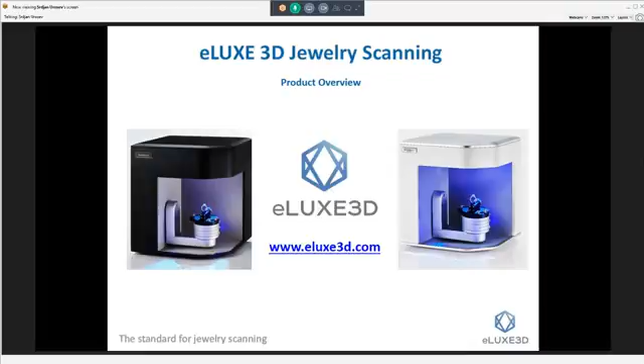For those not familiar with three-dimensional scanning, the two primary forms are laser scanning or structured light scanning. Laser scanners tend to have a sweeping red, blue, or even green line that's automated or sometimes manually operated with an external coordinate measuring machine, usually a fixed line that sweeps along the part and acquires point cloud data, which is ultimately turned into an STL or polygonal model.

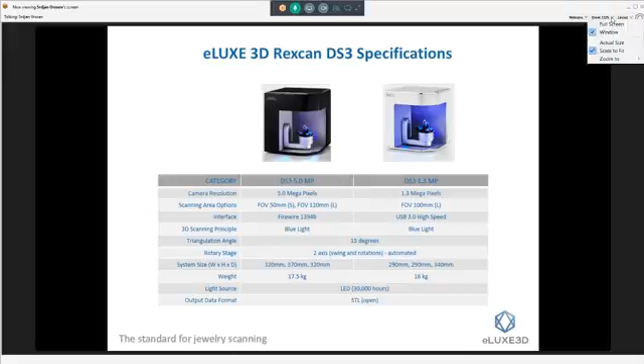Our technology works differently, in a structured light fashion - it's a megapixel-based system that works just like a digital camera. Your iPhone or traditional digital camera is a 5, 10, or maybe 40 megapixel system that acquires images in 2D. Our technology has the same principle, but it collects images in 3D. We project a fringe pattern onto the object, and the two cameras collecting and looking at the fringe pattern define the resolution and gather the data three-dimensionally. We don't have a lot of moving parts - the only moving part you'll see in the scanner is the platform swing that rotates and is fully automated. You'll see this live in just a minute.

The two systems we currently carry commercially are the Rexcan DS3 Silver and the Rexcan DS3 Gold. The primary difference between the two is resolution. The Silver system is a 1.3 megapixel, USB-based system that collects 1.3 million points per shot. The DS3 Gold is a 5 megapixel system with very high resolution, collecting 5 million points per shot. You can see some of the technical specifications here.

On the DS3 5-megapixel system, we've developed two versions: a 50 millimeter field of view and a 120 millimeter field of view. We initially had just the 120 millimeter field of view - that means how large of an object the system can see within a single scan, with 120mm being the maximum on the large field of view. We then developed the 50 millimeter field of view, a very high resolution system primarily targeted around detail-rich objects like engagement rings and high-resolution stones with lots of features. It's specifically designed for rings and very small objects within that 50 millimeter field of view.

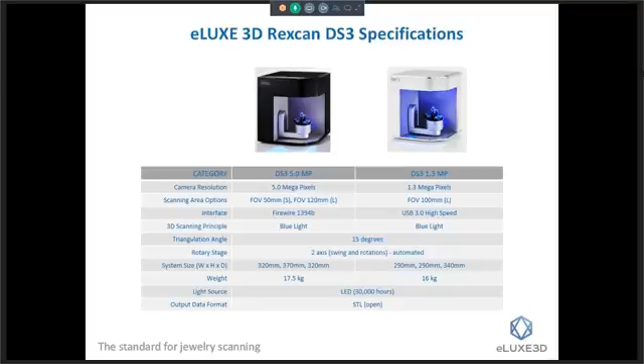One of the advantages that our systems carry is that we have an open STL platform, so we don't lock you into specific software that doesn't necessarily have any digital models. This gives us the opportunity to provide you with a digital model of some of the precious stones or precious pieces that have a lot of history behind them.

Custom fit wedding bands is a very popular use case. This process has taken a 3, 4, 5 day process down to less than a day. In 3 to 5 minutes, we're able to capture a perfect 3D model of that engagement ring, which gives you the opportunity to build that wedding band with a perfect fit. It really saves on the iterations of 3D printing and design iterations, so it's become very popular.

3D heirlooming, or digital heirlooming, is another format of use for our technology. Old existing pieces that may have been passed down to family members within generations can now be replicated or actually stored in a digital format, since they have family history behind them. So it's something a lot of our customers are doing.

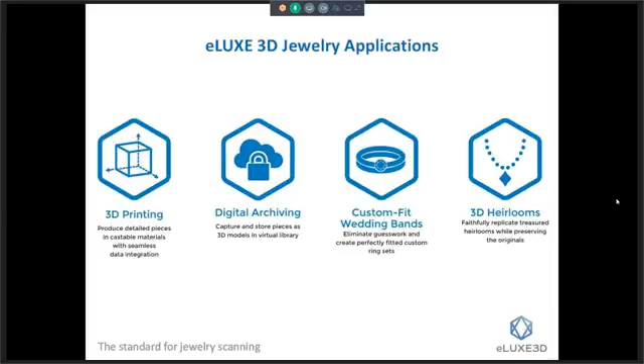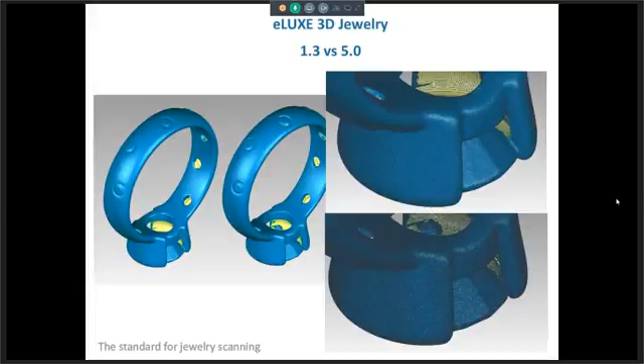To us, having been around the scanning industry for a very long time, this difference is something we can clearly see. But to somebody that's just looking to acquire data quickly for template or design purposes, the 1.3 megapixel system is a great system. You can kind of see the correlation between the two data sets.

Just a few samples for you of STL models — we're seeing on screen our STL models that are created from our scanner. Everything you're seeing are basically triangulated and fully watertight models.

Here's a ring that was scanned with a 5 megapixel system. You can see the detail and resolution — it's able to pick up on those prongs and how sharp and crisp they come out.

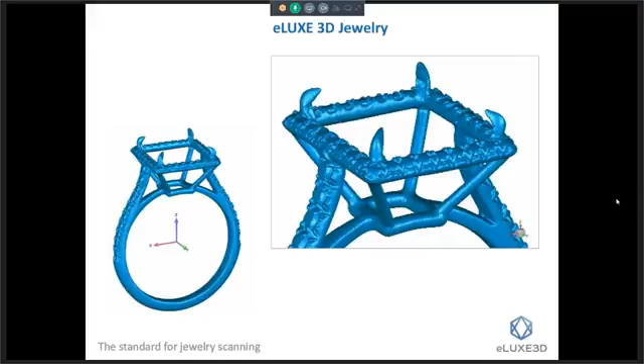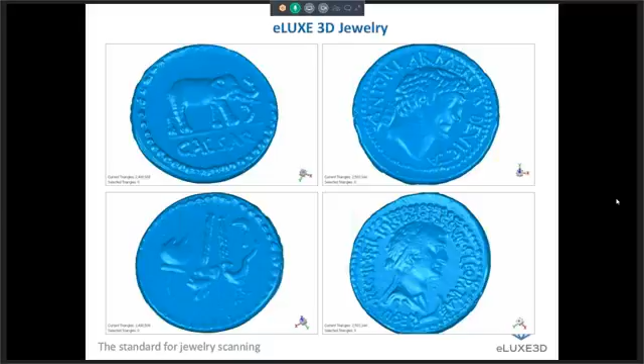Some old coins that were scanned in. Again, the detail is really something to pay attention to, because it's preserved very, very nicely in a polygonal format.

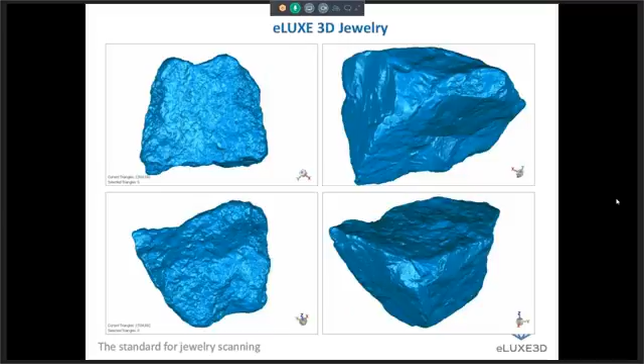These are just basic stones, but we wanted to show the actual capability and how much detail we're picking up. If you had some sort of an irregular stone that you needed to design around, we understand it's a very difficult process with traditional calipers and tracing methodologies, but we have the ability to provide a very detail-rich model for you to work with in your CAD packages.

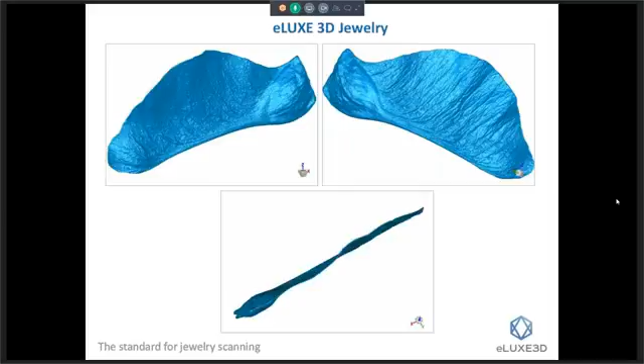This was a cool project we did for a local university. They just wanted to see if we could scan this — it was actually one of those helicopter leaves from a maple tree — just to see what kind of detail we're able to get. That's showing both sides of the actual leaf; you can see all the veins very crisply. This was done with a 5 megapixel small field of view, 50 millimeter field of view, so it gives you a real world scenario of what the capabilities are.

And of course, adding any sort of accessories to existing commercial products is a big market for some of you out there — the ability to take an existing product that's been launched and design accessories around it. This is just a Samsung watch, I believe, that was scanned with our 1.3 megapixel system scanner.

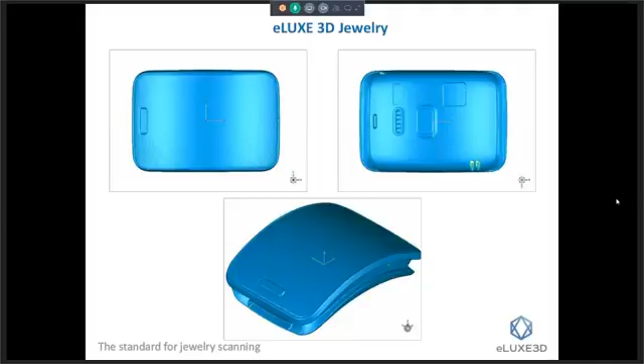So a lot of what we're talking about here is STL format-based. For our purposes at eLUXE3D, we are heavy users of Geomagic simply because we've been around it for a very long time. Geomagic Wrap in particular is a platform we utilize for cleaning up STLs, filling in holes, extracting features, and actually creating NURB surfaces. It's a product that's been around for a very long time and has developed a lot of great tools for being able to work with high-resolution STL models.

A lot of our customers use a combination of ZBrush, Rhino, Gemvision Matrix, 3Design, a few others that are out there. But we want to put enough tools in front of you to understand what you can and can't do with the technology and what the limitations are, because if you think about how much data we're collecting - millions and millions of polygons - there are certain CAD packages that are not designed to handle this type of geometry.

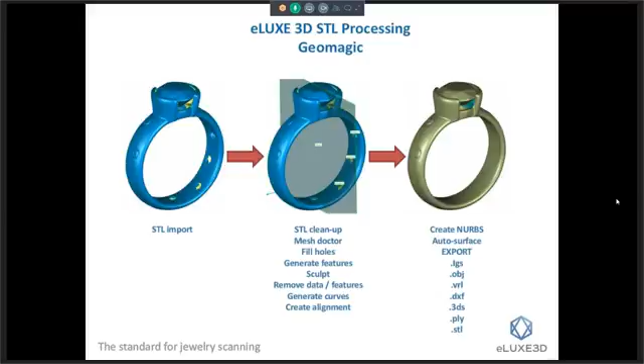So we're always working with our CAD suppliers and vendors to improve on their processing side. But for our immediate need, our go-to product is Geomagic on the reverse engineering side and on the inspection side. As I mentioned, it has a lot of polygon sculpting and cleanup capabilities to get you that watertight model.

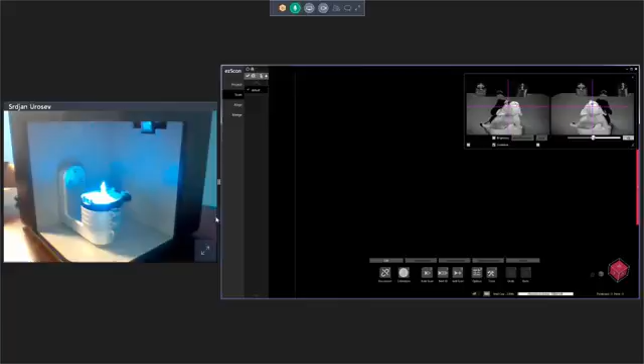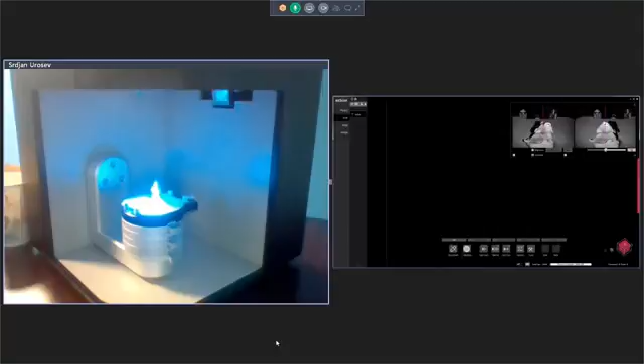Okay, we're back. Successfully transitioned from one piece of software to another, so that's always a good start to the day. You should be able to see a webcam showing the actual platform of the scanner itself, and in the background, depending on your layout, you can see our software product that we're going to be using to collect the data. Over the past couple of years we've really focused on developing a software and hardware product that's very easy to use, very automated, and doesn't require a lot of technical expertise.

eZScan 8 is a software platform that was recently launched in conjunction with the DS3 and the Silver and Gold systems, and we really were able to create a product that follows a process. So just to show you a little bit of the layout and how this software is actually developed...

On our left-hand side, we have our project tab, which is our starting tab for starting a new project or opening an existing one. Then we follow a process: we have our scan tab, align tab, and merge tab. We really want to create a process flow that your technical people use as they walk through the scanning process, so anything within your scanning capabilities that allows you to acquire data would be under your scan tab.

You can see this is a live feed - the left and right cameras are actually live right now. So if I put my hand in there, you can see it's actually picking up the data live. This little pendant we're scanning is a little puppy, about an inch in height, so it's relatively small. It has some detail on it, and this is what we'll be working with today.

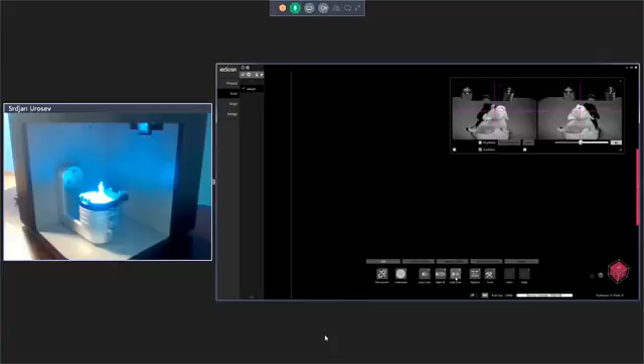We have what's called auto scan, which we're going to be running - it's just a string of macros. We have a next 10 button, which is unique to our technology, where the software automatically calculates the missing areas in the scan and generates the next 10 paths. Or we have what's called add scan, just an individual scan. If I click on add scan here, the system is going to move to a position we're looking at currently, and it's going to take a single shot.

And there's what we're kind of seeing on the screen from one orientation. Now you can tell that we've scanned some of the platform, the fixturing system that we currently use is just some putty.

The system does come with a ring jig. It comes with a full fixturing setup. But anything that'll just kind of fixture your object in a permanent orientation can be utilized to hold it in place. Your object cannot be moving independently from the swing or the turntable.

So what happens during the calibration process, we actually create an internal coordinate system that's saved within the calibration file. So every time we move this swing, it knows its previous position and registers the data together.

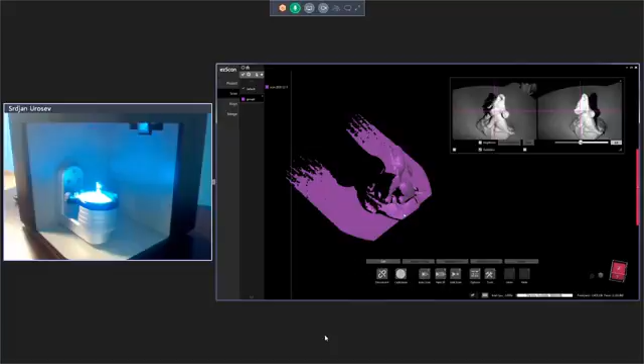So one nice tool I like to use here to kind of avoid scanning some of the turntable or the platform, what we're going to do is turn on what's called a clipping plane. I may be getting into some of the technical aspects of the software, but it's kind of nice to show.

So what I'll do is turn on our virtual clipping plane. I'm going to drop that clipping plane to right about there, and then we're just going to go ahead and hide that. Now as I run our macro, we're going to go through and delete anything that's below that plane. It really saves a little bit of time and cleanup and processing. So I'll go ahead and delete this group.

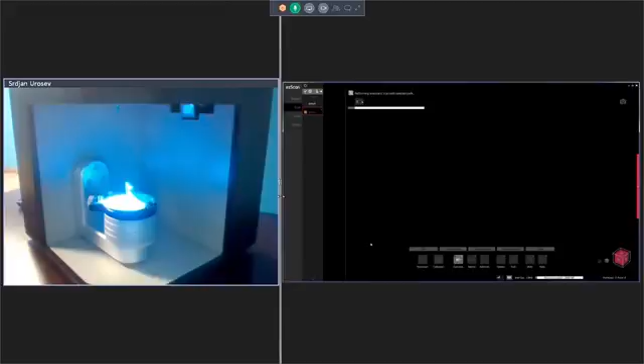And instead of doing an individual scan, I'm going to run through what's called an auto scan. This is basically a macro of, I think, 12 to 14 positions that we have for demonstration purposes. So it's really hands-off. You set the part down, you fixture it, hit the play button, and let the software do its thing.

There's no registration that has to be done on the fly. Everything is done automatically as far as scanning is concerned.

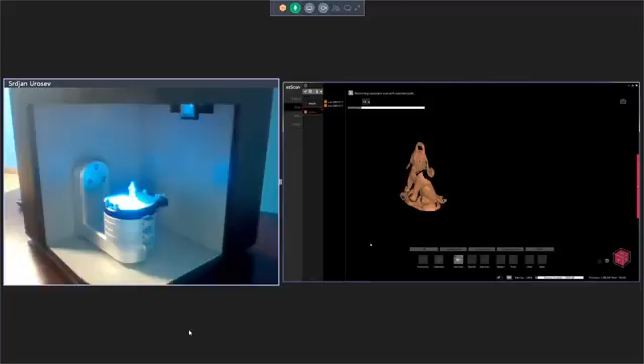Looking back on the left-hand side, we have a group 1 being created. So as we're running this macro, the software automatically creates a group, and within that group you can see scans being populated. So we have scan 1, scan 2, scan 3. It basically follows with a date and timestamp, but those names could obviously be changed if needed.

So we're scanning live right now, as you should see on the screen. This puppy is being populated very, very quickly.

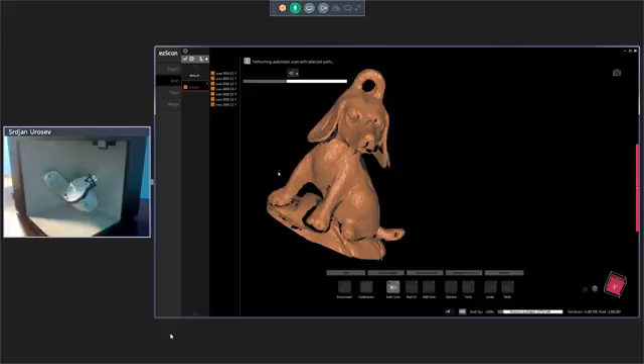I'm going to zoom in a little bit for you guys so you can see some of the detail. There are some waves in the actual design of this piece. The eyeballs are some sort of tiny little stones, but this orange peel detail that you're seeing on the puppy is actually on the object. This is not scan noise or something like that. This is actually detail that was designed into our piece here.

So we'll let this finalize, and what I'd like to do today is walk you through the full process and what limitations we have with the system, and what we need to do in order to have a full 3D scan that might be watertight, if you will.

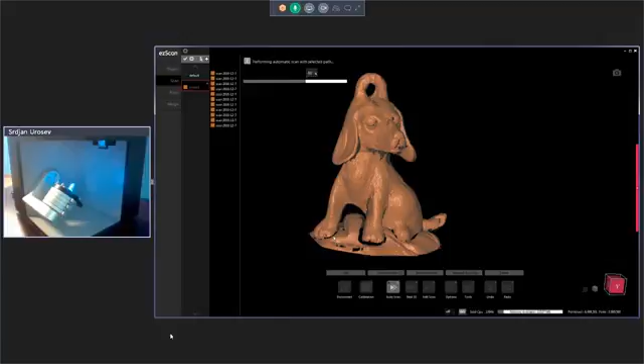Because as you may know, with non-contact scanning, it is line of sight based. What line of sight means is that what it sees, it will scan. So if I gently rotate this guy kind of upside down, you can see we're going to have some missing data simply because the scanner can't quite see that location underneath.

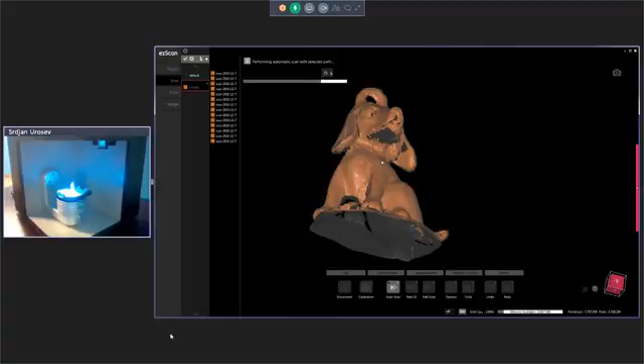So some objects, some very high detailed rings that have pockets or holes that are not visible to the naked eye in certain orientations, the scanner might have a hard time seeing those. But with multiple orientations, we typically are able to gather most, if not all, of the data.

But that's just something for you guys to understand, that we're not seeing through objects. We're not seeing through the actual physical object. We don't see through stones. It is line of sight. So once...

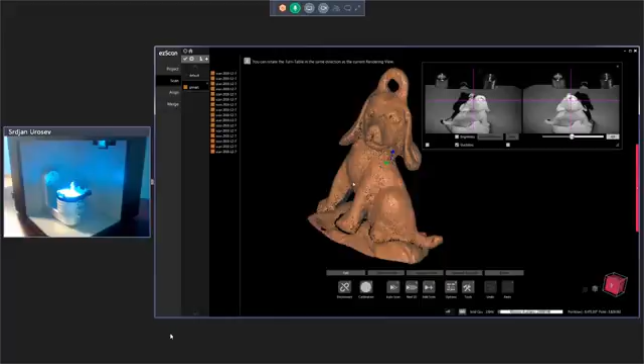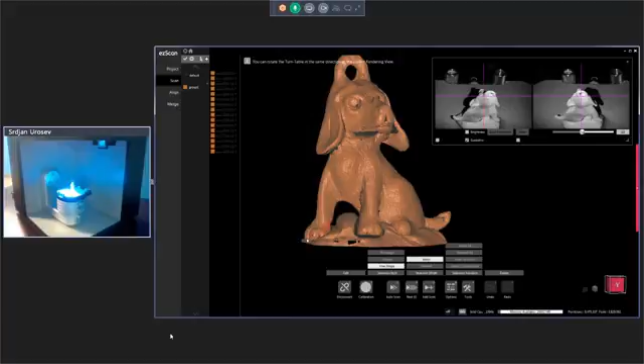So quickly, at this point, what I'm going to do is delete some of this putty, or the fixturing, if you will. I'm going to turn on my edit command. I'm going to use a free shape and a select. So what I'll do is just kind of select the areas that I don't need and delete them out.

And if I touch on a little bit of our actual part, our puppy here, it's okay, because what we're going to do next is flip this puppy upside down and gather up the rest of the missing data, and then walk through an alignment process.

So again, we're doing this live. There are no tricks here behind what we're doing. We just want to get you guys to understand the full capability of the product.

Very easy workflow. If you put down the product for a couple weeks and turn it back on, it's not something you have to reach for the manual for. It's something you'll pick up automatically, which was kind of our key in trying to develop and streamline this process.

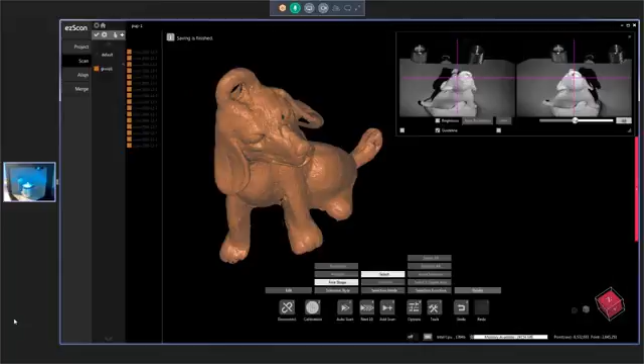I'm going to do a quick save as here, and we'll just call this Pup 1. I get in the habit of saving quite often, as you don't like to lose work, and in case there's some sort of a crash, you always have your file saved.

Okay, so here's what we're going to do now. We have our group 1, which has probably 85% of our scan, but we're missing a little bit of this guy on the bottom. So I'm actually going to remove this platform from our scanner, from our jig, and take this puppy off. I'm really doing this live, so please be patient with me.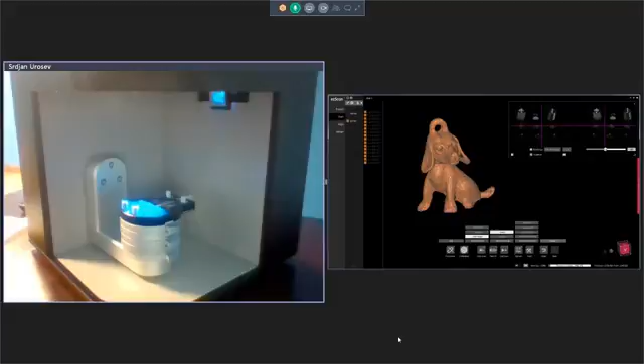We're going to just flip it upside down and fixture it back in. One thing I should have mentioned, which I didn't, is that we do add a little bit of spray on the object.

With scanning technology, if it's very shiny, reflective, transparent, or translucent, you have to spray the object down a little bit to take that shine and reflectivity off. It's very common with most scanning technologies out there. We have several different forms of spraying down the object, whether it's a 3D scan spray or a mixture of washable paint and an airbrush kit, and that's something we will definitely walk you guys through as needed.

So right now I'm going to flip this puppy upside down and add just a little bit of spray to it. Obviously you won't be seeing that portion, but trust me, that's what I'm doing. Make sure I've got him fixtured in so he doesn't move.

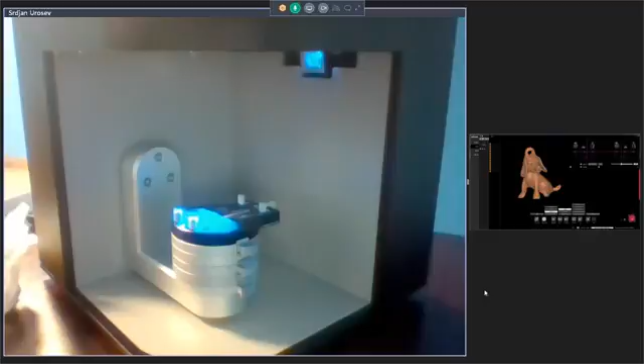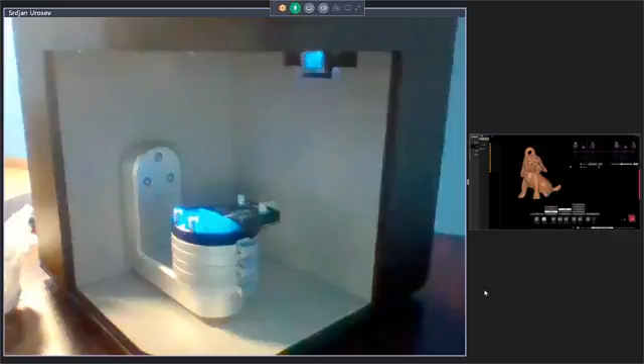You might be able to hear the spray in the background a little bit. This spray I'm using is actually a 3D scan spray developed by a company out of Germany called Helling. It adds about 3 to 5 microns of spray depending on how much texture you put on it, but it's a very, very fine spray that does not take away from the detail of your object.

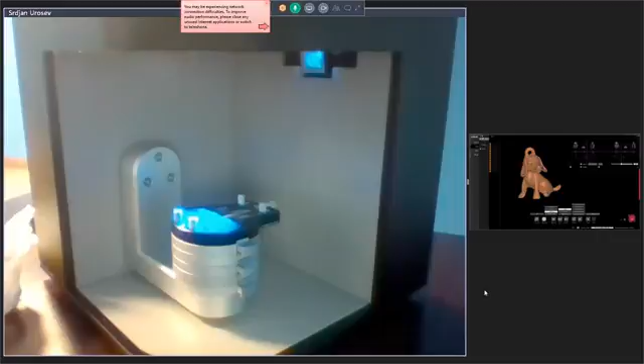Okay, I'll go ahead and drop this guy back into position and tighten up our fixture. And now you can see our camera is seeing a different view, a different orientation.

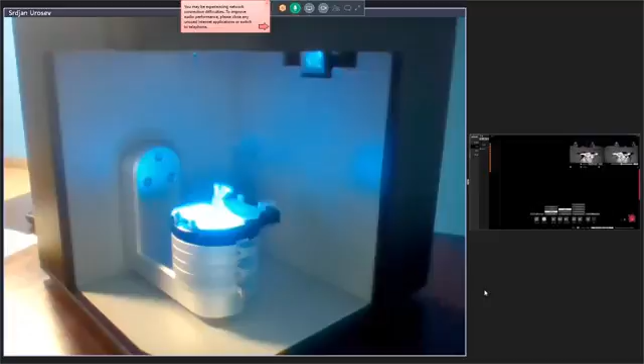At this point I'm just going to click on the auto scan button. Actually, what I'm going to do is take one scan because I'd like to predefine my clipping plane again. In order to predefine that clipping plane, you want to have one scan on the screen so you can see where you're trimming with the virtual clipping plane. Otherwise, you might be taken away from your object.

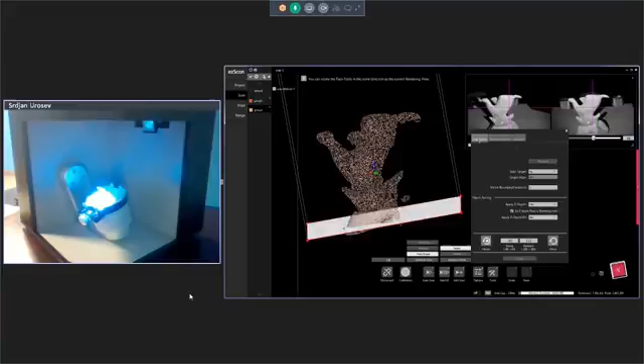So I'm going to go back into my options, turn on my clipping plane, and you can see that I can definitely bring this up a little bit. We're good there. I can delete group 2, and then I'm going to run auto scan with the same macro.

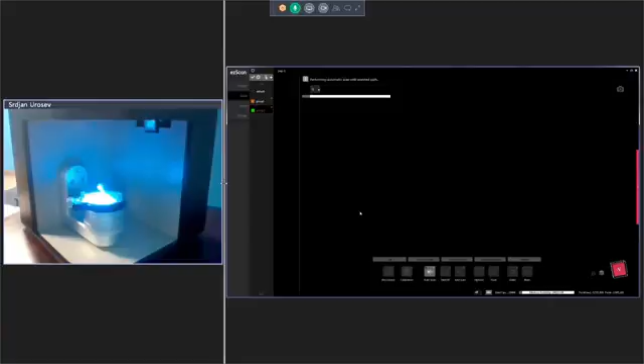The macros are basically kind of embedded in the product. You can create your own macro, and all a macro is, is a string of positions, a rotation and a swing. It's an XML file that could be edited, generated within the tools and options that we provide, or edited in just a notepad or some sort of comma separated value format. But all it is, is multiple orientations and a swing in position.

Once the actual swing moves, the scanner takes over and takes a picture. And now you can see we're kind of filling in the blanks. I'm running the same exact macro as we ran for group 1.

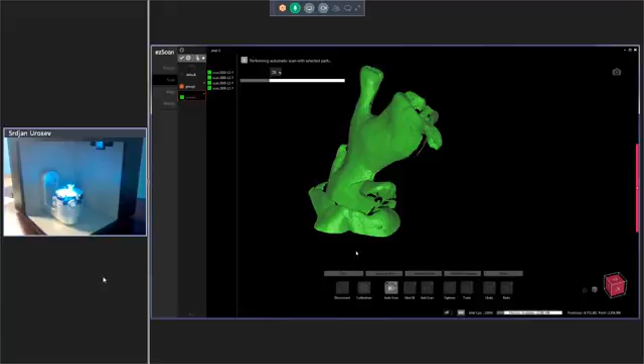As you can see on the left-hand side here, we have group 2 that was created, and all the individual scans that fall within group 2. Our next step is going to be to take group 1 and group 2 and align them together, which is something we're going to do in this product as well. So as soon as this is finished, we'll clean up some of the areas that we don't need and align them together.

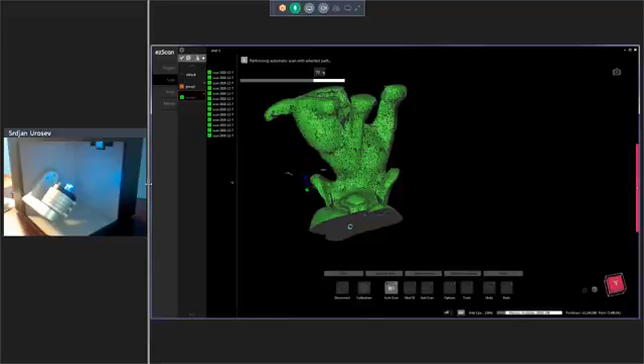All right, looks like we just finished the last scan. We're going through a quick global align. And there is our group 2 scan.

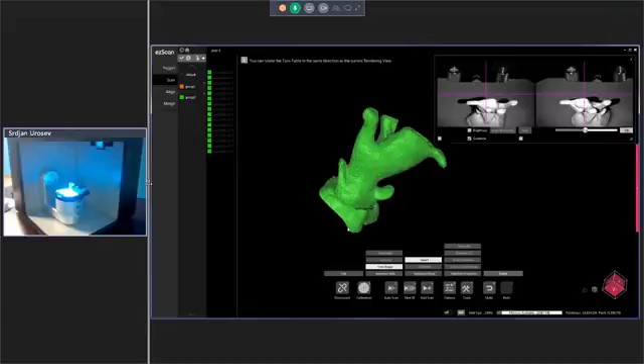Again, I'm going to go into our editing and just delete some of this noise that was picked up during the scanning, whether it's the platform or some background noise. I am going to zoom in and nicely trim around this putty.

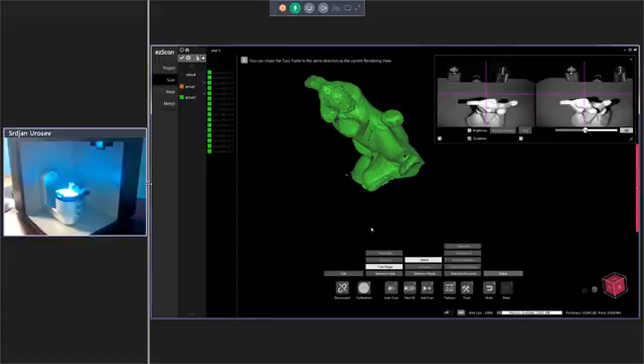This putty is just one of multiple forms of being able to fixture the object down. Hot glue is used quite often. Our customers have developed some of their own fixturing systems. The system, as I mentioned, does come with a very nice ring jig. It's basically a mini vise with some rubber padding on the inside, so it doesn't really deform your object. Again, the goal is just to fixture the object in an orientation that will prevent it from moving during scanning.

Okay, so now we have the bottom portion of our puppy scanned. To play it safe, I'm going to do a save as and overwrite the previous file. So we have that saved. Yes, we'll overwrite it. Now that our scanning is complete, we're going to go to the next phase, which is our align phase.

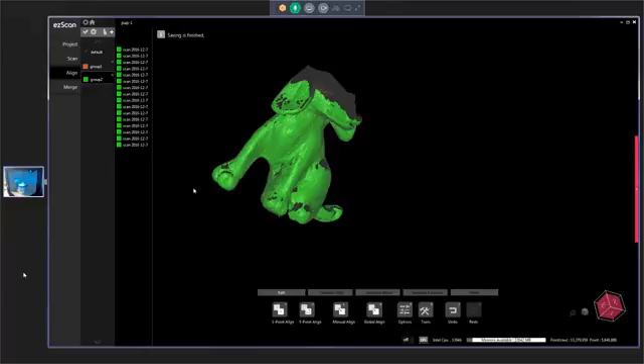As I click on the align phase, our cameras disappear. Now our icons down here at the bottom also change, and now we have a couple forms of alignment that we're going to be able to work with. I'll go ahead and turn on group 1, so you can see that we have 2 groups of scans that are in different orientations. And then we have a couple different alignment options here.

We have a 1-point alignment, a 3-point alignment, a manual alignment, and then a global alignment. These are very standard alignments that you guys may have seen in other CAD packages. 1 point is most common that we use. It's a very nice form of alignment. You just click on one common point and the software will take over. 3 points will allow you to pick 3 common points. Manual alignment will allow you to just rotate one of the objects on the screen manually. And then global alignment is basically a curvature-based global registration that we'll do as a final step to ensure all the individual scans are globally registered.

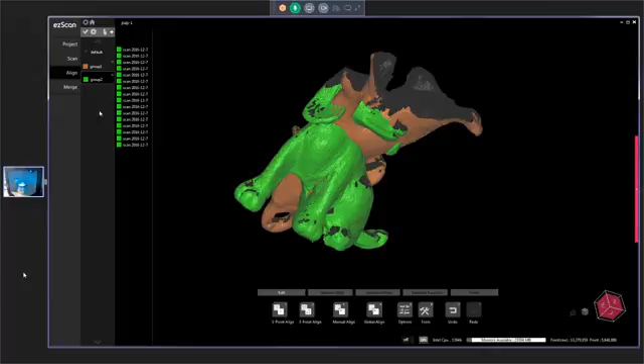So what we do here is we click on the group that we want to move. I'll make group 2 as my movable object. I'm going to click on that, and I'll click on 1-point align. This breaks up our screen into 3 orientations. We have our blue, which is our movable, in the upper right-hand side. We have our white model, which is our fixed model, in the lower right-hand side. And then on the left side, we have our blue and white showing us what the actual alignment is going to look like when done.

So with the 1-point align, the only thing you have to be concerned about is that you have these objects approximately in the same orientation in 3D space. I basically have the puppy approximately aligned in the same orientation in both views here, and we're going to click on one common point. I'm going to click on this little neck area here. This point is approximately there. The software takes over and then looks for the overlapping information, and if you can kind of see on our left-hand side, based on our view orientation and the common curvature between the two, it snaps them together very nicely. It gives you a little bit of a distribution chart here.

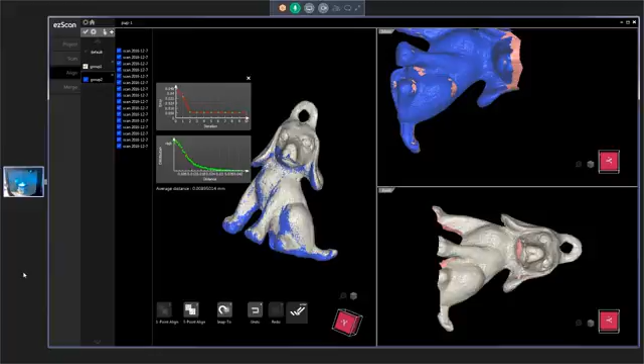It gives you an error and the distribution deviation, how much the actual objects have moved when aligned. So we're within about 8 microns as the average distance along all these scans. We'll click enter, and yes, we want to apply those changes. So now if I look at my 2 groups of scans, they overlap quite nicely.

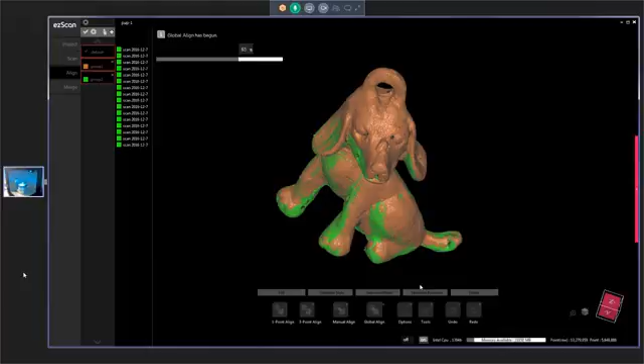One final thing I like to do is do what's called a global alignment. So we just did an alignment based on individual groups. I'm going to click on this little finger up here, deselect all, and actually I'm going to select all, then click on global alignment. What global alignment does is actually takes over all the scans on an individual scan basis and does a final global registration, kind of bleeds through in case there was any vibration or in case I bumped the scanner or bumped the desk or something of that nature.

It just tightens everything up. So you can see that we went from approximately 8 micron distance down to about 3-4 micron as the average distance between scans. And you can see the colors, how they bleed through in a format that tells me that this is a very good registration and I'm happy with it. So at this point, we're going to go ahead and save this again.

And then we're going to walk through the final step, which is our merge. So we're going to go to our merge tab. Merge is basically exactly what it states. We're going to merge these objects into one individual STL. Right now, they are still all based on 2 groups with about 15 or 16 scans in each group.

I'm going to go through and select both of these groups, click on the merge object, and then we have some tools here to work with. Some of the tools that we predefine are strictly based on our merge resolution and file size. File size is linked to how large of an STL you'd like to have.

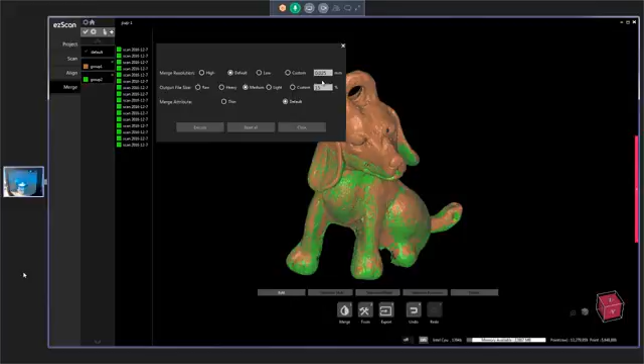So the way this works, for example, my default merge resolution, or the triangle edge length or point distribution, is about 25 microns, which is pretty good. Most printers, you guys are printing at about 10, 15, 25 micron settings, so that's pretty good.

Our output file size is going to be medium. So we're going to decimate this from approximately, if you look in the lower right-hand corner, 13 million points, we're going to get rid of approximately 65-75% of that data, still keeping the resolution of our data intact, not losing any detail, but really minimizing how large our file size is. You can input a custom value here as well based on percentage.

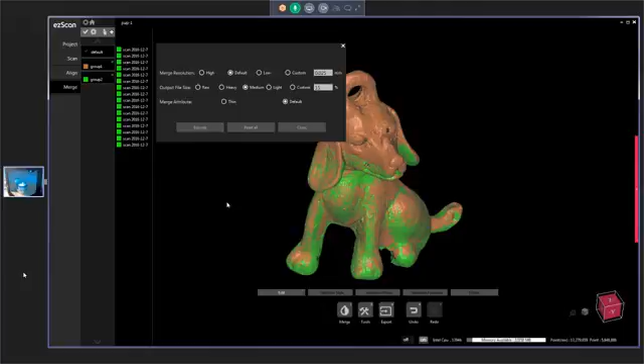We'll just go with default and medium. We'll go ahead and execute that. We'll say yes because we have saved this. And now it's going to take a minute or so, or maybe hopefully less than a minute, to merge this together.

In case you guys are wondering what kind of machine I'm running on, I have an off-the-shelf HP ZBook with Windows 7 with a Core i7 processor. So we do need some power, some horsepower between a laptop or a desktop. We run on Windows 7 or Windows 10. But something that's off the shelf, that you typically run your CAD system on, would be sufficient to run the scanner. Graphics card is important, good processor is important, and the RAM distribution is relatively important.

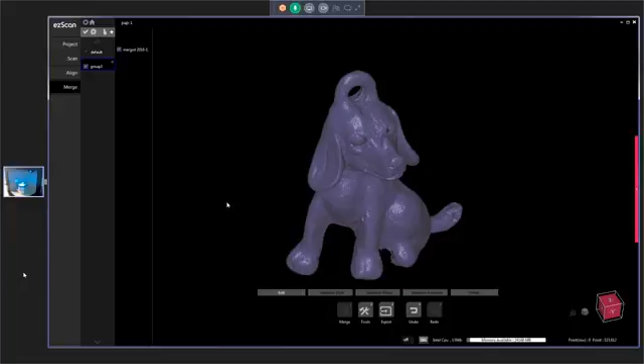One reason I like to save the files as I go along is obviously unexpected crashes every once in a while do happen, so you want to make sure you preserve your work. Second, once you finalize your alignment and go through the merge step, you can see that now we just have one group and one file. So we've merged all of those scans together, and you can no longer go back and add scans, right?

So we're actually now going to export out an STL or an OBJ file in this phase. If you ever wanted to go back and add additional scans, you really have to do it on the raw metadata file, which is an extension of MDT. That's our raw file format, and that will allow you to add additional scans, additional orientations.

So with file management, as our customers get familiar, they typically save the raw file format, export out the STL file. Once they're happy and working on the STL file within their downstream process, you can go back and delete the original metadata MDT file with all the raw information.

So in a nutshell, that's basically the process of scan, align, and merge. At this point, we're going to say export, and I'm just going to say export STL with OBJ, PLY, a couple different formats. We'll drop this on the desktop again. And that will kind of bring us to an end of the demonstration.

There are additional tools that we didn't cover here, some of the advanced tools like going through and creating your own macro settings. We do have some decimation tools, just to kind of walk through some mesh repair tools, smoothing, deleting of clusters, decimation, manual hole filling. So we do have tools that will allow you to massage the data or clean it up once the scan is complete and once the merge is complete. But it's just part of some of the advanced training that we'll walk you guys through in the future.